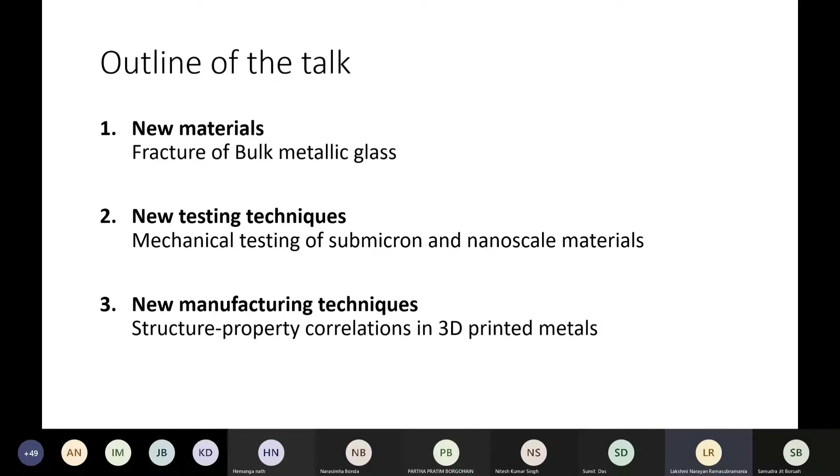It's not like printing a piece of paper. You are going to print real objects using a 3D printer. So we are going to look at aspects of this, the materials aspect as well as the mechanical aspects of these topics, and it's going to be interdisciplinary in nature. I'm going to show you where you can play a role and where materials engineers also learn the subject of mechanical engineering. So to start with, I'll go with my first part where we talk about new materials.

And this leads to crystallization. Crystallization here is nothing but the atoms sitting in a very nice, orderly fashion. You would have heard of several crystal structures by the name of body-centered cubic, face-centered cubic, and different kinds, maybe even hexagonal close-packed. With these kinds of crystal structures, you essentially see that the metal has solidified, and the volume keeps shrinking. You sometimes have shrinkage, different kinds of defects, residual strains, and all those aspects come into the picture of solidification.

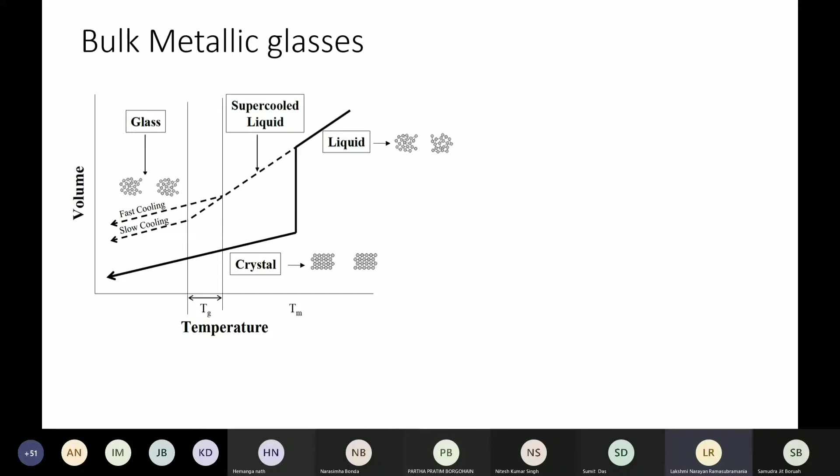However, there is another regime where when you cool it rapidly enough, you can actually make sure that the liquid structure is preserved. The concept that this entails is known as the glass transition, and it happens over a range of temperature known as TG. This is again very well known in polymers. Essentially what happens is you avoid crystallization, although that is the most likely process available to the material. It is thermodynamically favorable for a material to become crystalline rather than a glass, but if you rapidly cool it, you can still preserve the structure of the liquid.

When we look at the micrograph, when you look at this material under the microscope, for most metals which have crystallized, you will see something like this. Of course, you're not going to see balls, what you're going to see is pockets, and each of these pockets represents a grain. There is one pocket which has a certain orientation of these atoms; that is your grain one, and the others have different orientations, and they are separated by something called a grain boundary.

In contrast, in metallic glasses, you have several components. In this case, you can see 4 elements, 4 different kinds of spheres have been used. Because of this, the structure is very random, and since it's very random, you cannot really delineate a space where there is a fixed organization of atoms, or a fixed order of atoms. So these are highly disordered atoms sitting in a pool. And this is a solid, don't think this is a liquid. This is still a solid.

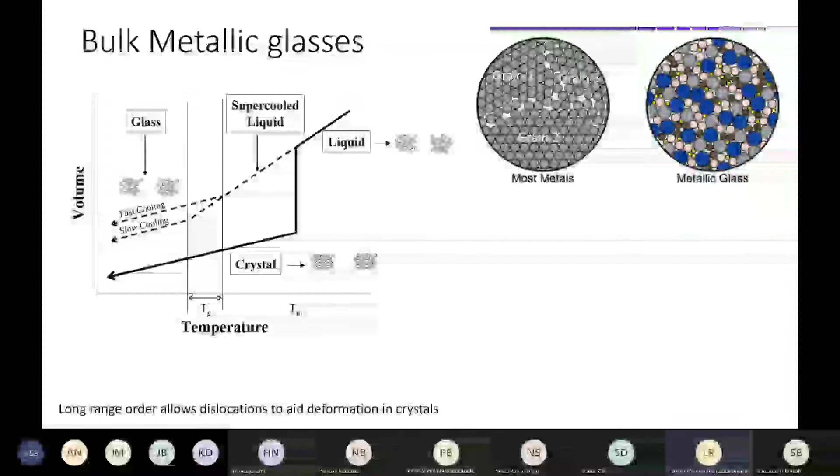The feature you need to remember is that in grains, because of this fixed orientation, you are allowing dislocations to be inside the crystal. You are able to define something called a dislocation. What are dislocations? This is something you would have seen in mechanical metallurgy. There is a plane of atoms which is going to move relative to the other. If you can see this GIF I have posted here, when you shear an object, you essentially create a small dislocation which looks like an inverted T, and that moves across the crystal and cuts through it. So you are able to accommodate plastic strain by this dislocation.

But you cannot define such a thing in metallic glasses. You can obviously see here we can define a crystallographic plane over which this dislocation is sliding, and there are identical bonds above the half plane and below the half plane. So you essentially have the same environment, and there is no net energy loss when this dislocation moves from one end to the other. You're always preserving the number of bonds. But in a metallic glass, you can never achieve that - you cannot define a dislocation.

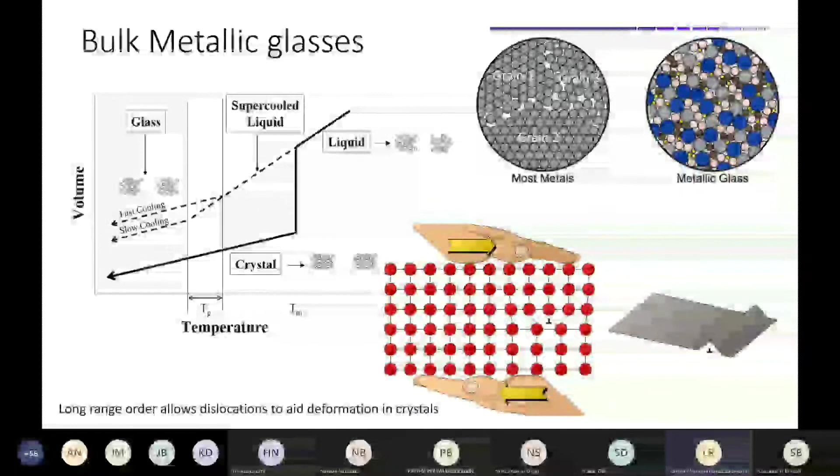So what is so great about metallic glass? I don't know what has happened to my presentation. Just give me a second, I think there is an issue. Yeah, sorry, yes.

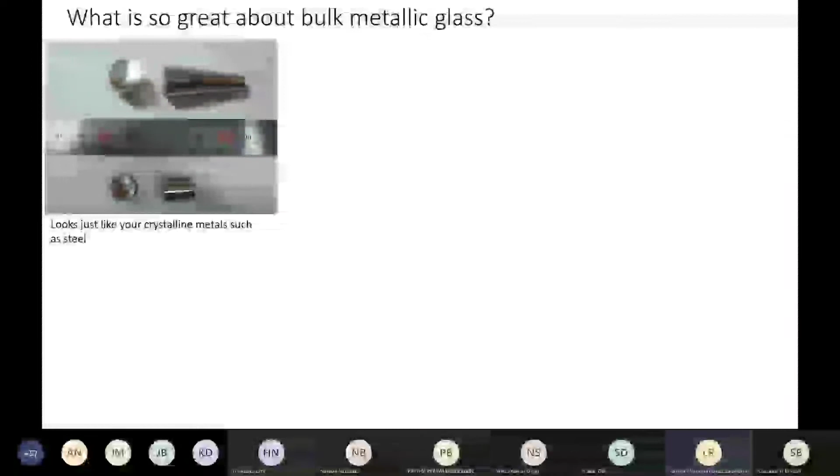So what is so great about metallic glasses? Your metallic glasses just look like crystalline metals such as steel, it will have a very shiny luster - in fact, it is much more shiny than steels. Now, the difference is that when you have a steel base and you drop a ball bearing over the steel base, you see that the ball only bounces a few times. I will let this GIF play in front of you - observe that when this person drops the steel ball over the steel plate, it bounces about 4 times. But when you do the same on a metallic glass base, you see that the ball keeps bouncing on it.

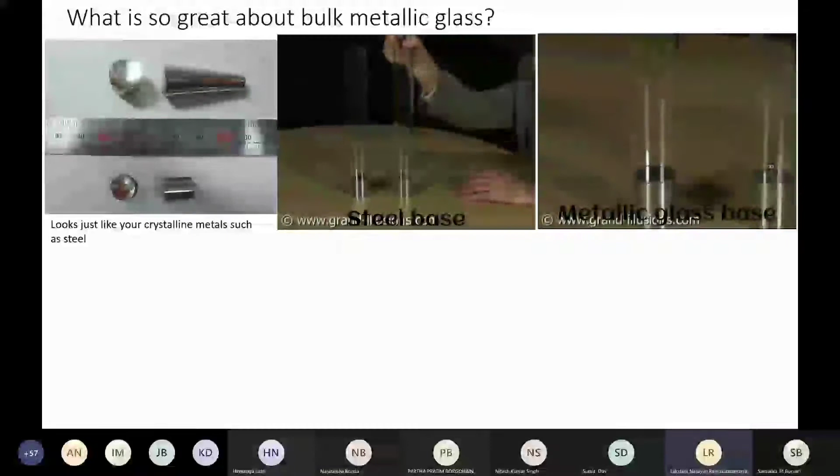You might have heard of coefficient of restitution, but coefficient of restitution is surface dependent. In this case, metallic glass offers a greater amount of bounce, a greater coefficient of restitution, meaning the kinetic energy of the ball is completely returned to it in an ideal situation. So metallic glasses absorb the energy and immediately release it back to the steel ball.

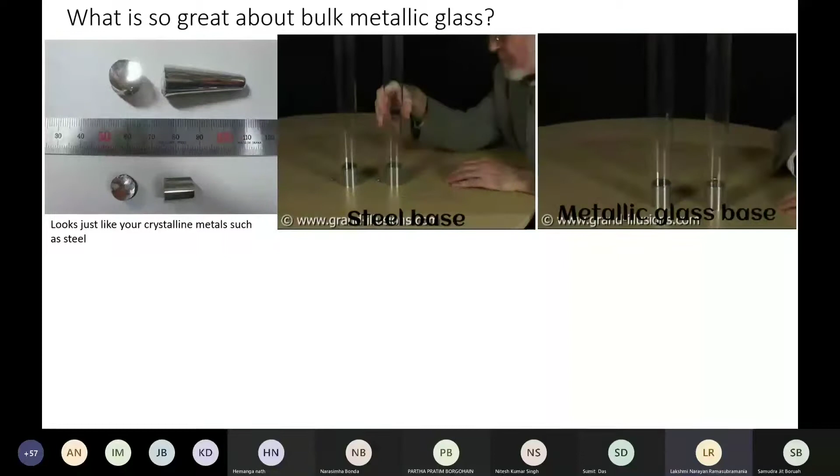What this implies is that if you look at a stress strain curve, you have an elastic region, a yield point, and an ultimate fracture point. Looking at the elastic region, steel has a lesser elastic region than metallic glass. As in, steel will yield at a lower stress than a metallic glass.

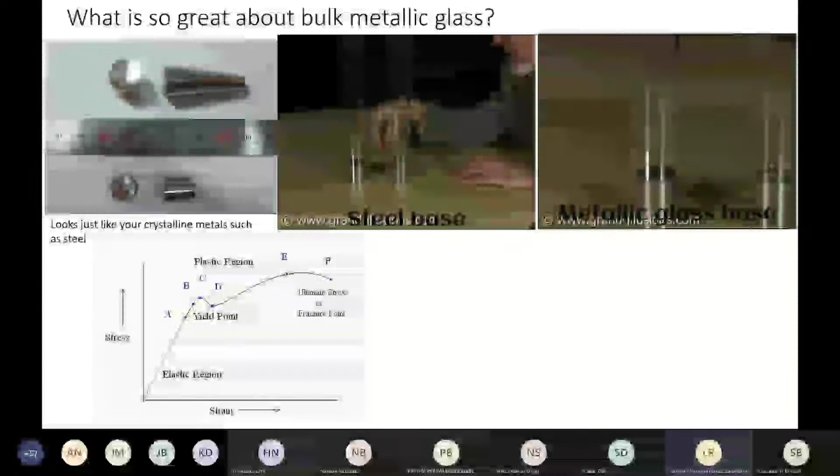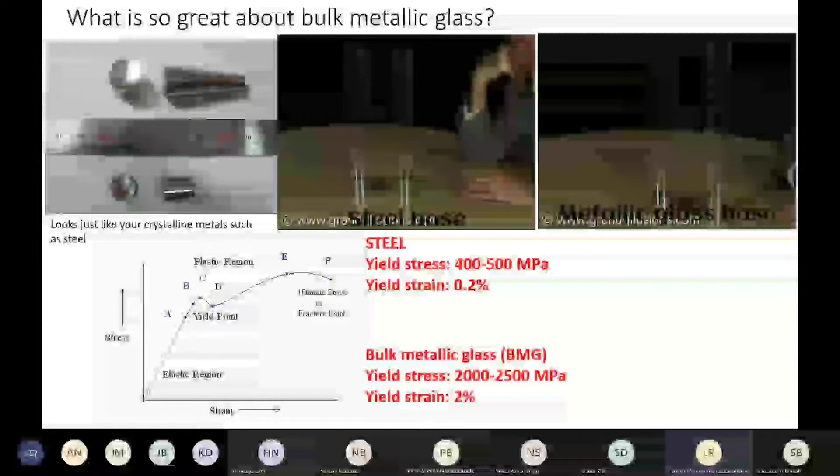And that is what we see. The yield stress of steel is about 400 to 500 MPa, and the yield strain is also 0.2%. On the other hand, metallic glasses are at least 5 to 10 times stronger, and the yield strain is at least 10 times higher, which is exceptional for a material of this class.

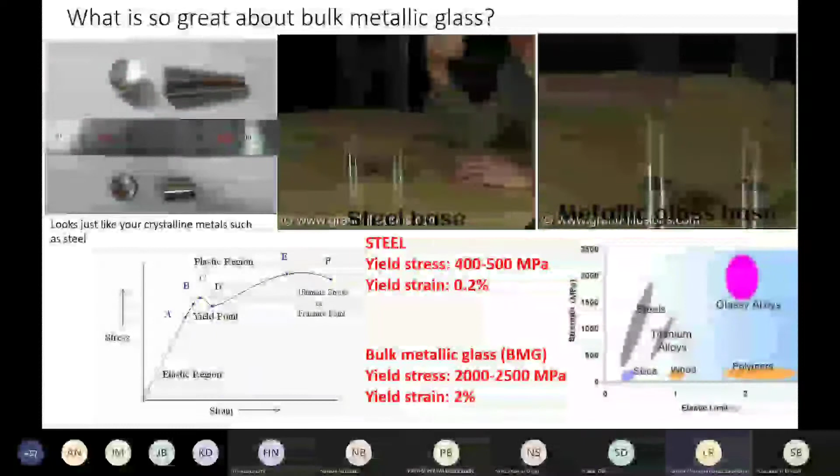So as we can see, these are indeed capable of being stronger than any other conventional crystalline material. And that is why metallic glasses have got a separate space for themselves.

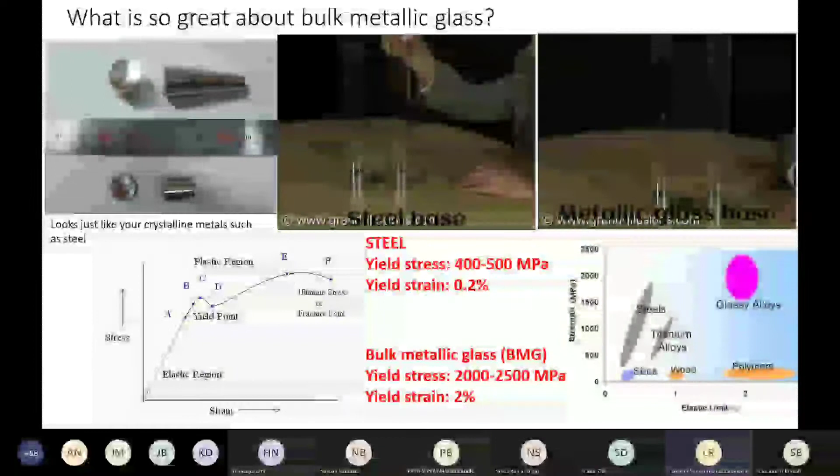If you look at all the materials in a curve comparing strength and elastic limit, metals typically have higher strength but lower elastic limit. Whereas metallic glasses have both high strength and high elastic limits. This is known as an Ashby chart, and we will look at some more as we go ahead.

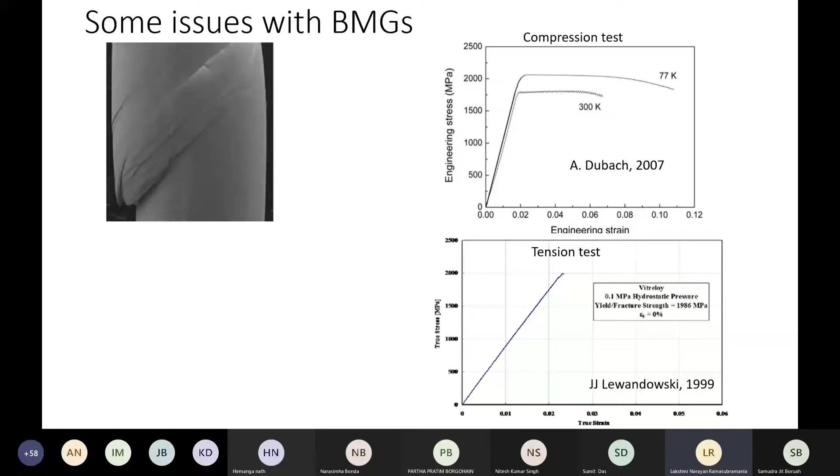But then when I do a tension test, what really happens is that the material does not show anything beyond the yield stress. Again, you see the elastic portion goes up to 2000 MPa, but then after that, the material fails. You don't see any ductility. And that is what we also see, some kind of brittle failure. So this material appears to have plastic deformation only during compression and not during tension.

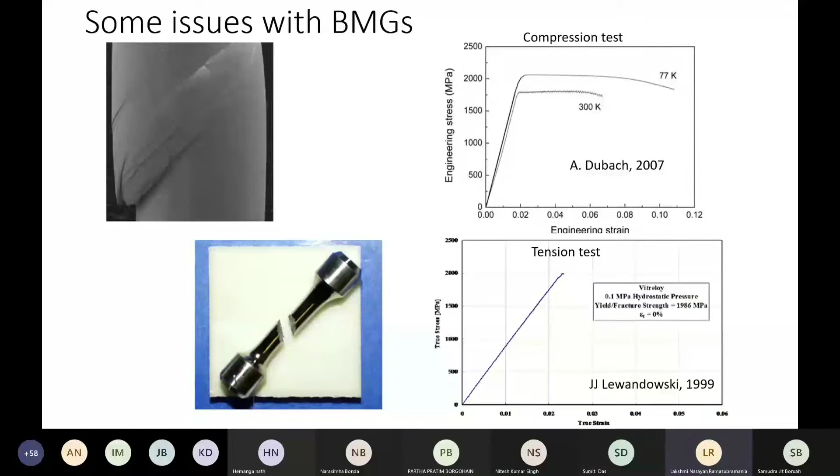So that is a major problem, because in materials used for structural applications, you would want them to deform plastically also. You want them to undergo graceful failure. Otherwise, this would lead to catastrophic failure of materials.

So now we are going to look at some deformation mechanisms to understand why it does not have tensile ductility. The reason is, if you look at an amorphous structure, you really cannot define dislocations, as I had mentioned earlier. So what you do is define small clusters known as shear transformation zones, where one half of this zone moves relative to the other and accommodates strain.

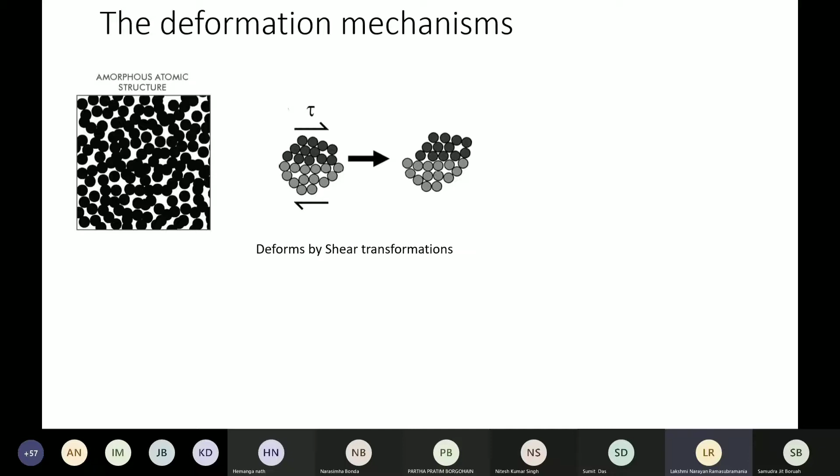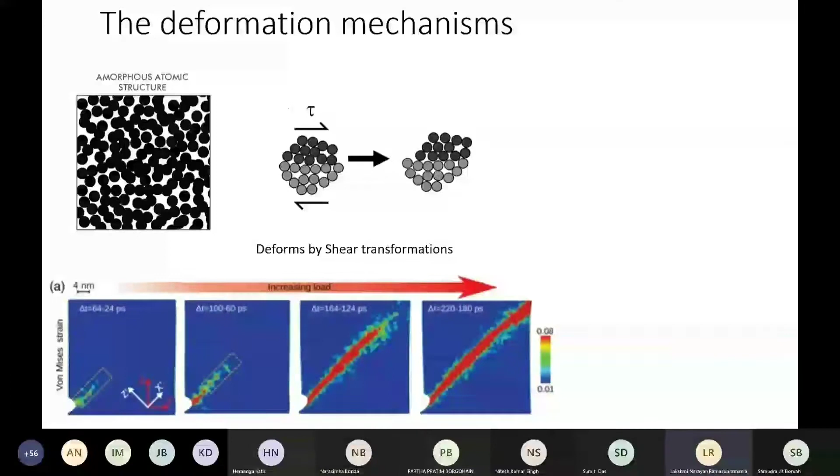This was developed by Ali Argon in his classical paper in 1979. This theory is then used to understand what really happens when plastic strain is developed in a metallic glass. Your shear transformation zones essentially join together inside the material, one by one, collectively, and lead to the formation of a macroscopic shear band, which in reality looks like what you see in this picture.

Now, what are the implications of these shear bands on fracture toughness? Fracture toughness, as you know, is a property extremely related to plasticity. If a material has a higher ability to take more plastic strain, it will have higher fracture toughness. That is what we learned, because we talk about the area under the stress strain curve till failure, which means there's a large scope for plasticity to play a role in fracture toughness.

But fracture toughness, for mechanical engineers, has a very different definition. We are not going to look at the stress strain curve itself. We are going to define a crack, and we are going to see how much the material can prevent the crack from propagating.

So you assume the presence of a flaw, and then you apply loads, and then you see how much resistance a material can offer. That, of course, depends on the amount of plasticity that develops in front of a crack tip. So when people measured this fracture toughness, which is measured as K1C, where 1 implies that you are applying load in the mode 1 condition, and then compare it with

the yield strength in this Ashby chart, and you put all the materials here, you'll see that metallic glasses are again very high toughness materials. At least they are very close to that of your conventional alloys, and also have very high yield strength. So it is a very rare material where you have high yield strength and fracture toughness.

Unlike ceramics, if you look at ceramics, ceramics only have very high yield strength. Let us look at ZrO2, MgO, as well as aluminum oxide. You see, they have very low fracture toughness, probably like 1 MPa root meter, but they have very, very good yield strength. So metallic glasses can actually be an interface, or rather better materials than both ceramics and metals. And that is why these metals are considered very nice.

But if you notice, metallic glasses also have a very high range of toughness. It can be as low as 10 MPa root meter, but also can be as high as 100 MPa root meter. As you can see, the y-axis here is a logarithmic axis, and hence from 10 to 100, the toughness of your metallic glass can vary. So this high level of variability brings in the question, what all factors decide the toughness of metallic glasses? What is the inherent physical or mechanical property that controls your metallic glass fracture toughness?

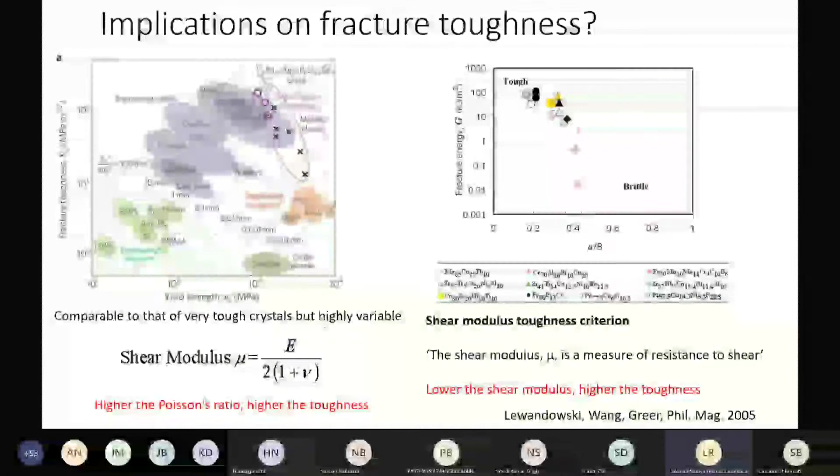But unfortunately, this criterion does not always work, because when you look at a collection of different metallic glasses, they observed that while a critical Poisson's ratio of 0.32 exists, below which you are going to have brittle glasses - for example iron-based glasses, magnesium-based glasses, and calcium-based glasses have very, very low fracture toughness - these have been marked with different kinds of symbols and labeled. And when you go to higher Poisson's ratio, you expect all of them to have very high fracture toughness. For example copper-based, iron-based, some zirconium-based also show very high fracture toughness.

But if you look at some of these small data points on the top right side, you see gold-based metallic glasses have very low fracture toughness, whereas palladium-based glasses are almost as high as 200 kilojoule per meter square. Your gold-based metallic glasses are only 10 kilojoule per meter square - this is the fracture energy, another way of representing your fracture toughness. So gold doesn't really follow this rule, because according to the Poisson's ratio rule, the higher the Poisson's ratio, the higher the fracture toughness should be. So it obviously does not follow this particular criterion.

This criterion may not always work, and there is a reason why - because you're using an elastic parameter to understand plasticity, which is always a questionable thing to do. So what do we do? As mechanical engineers and materials engineers, we look at a structural perspective. That is most important, because mechanical engineers cannot really use an elastic parameter to define a plastic situation, right?

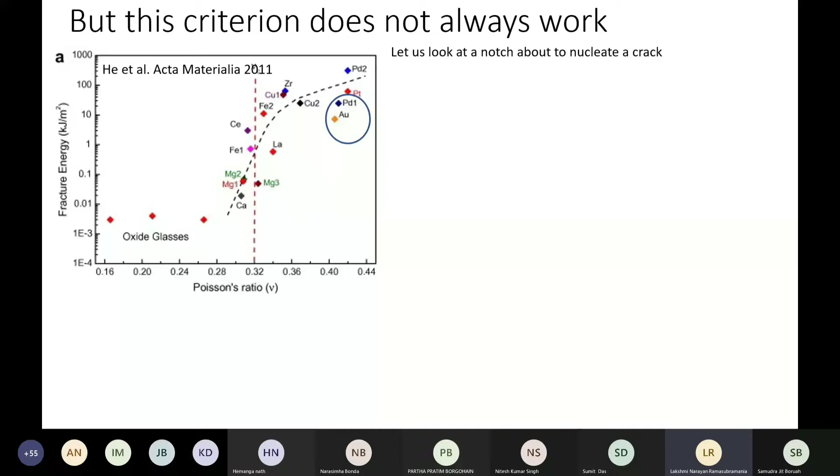So what we'll do is look at the notch which is about to nucleate a crack. What is the nature of this particular notch? There is a stress concentration, and ahead of the stress concentration, when you apply load - remember that the load is being applied in mode 1, which means you can assume that in the plane of the paper this notch is being loaded, essentially force is being applied vertically to this particular picture. So you see several shear bands that are formed in front of the notch tip.

When a crack really nucleates, it forms within one of these shear bands. That is very evident here. You can see on the left, this is just before a crack forms, and on the right, a crack actually goes through one of these shear bands.

Not all of these shear bands are cracks. They can be potential cracks, but only one of them is chosen to be the vehicle for the crack to propagate. So it was found by several researchers, in fact Parag, who is a faculty at IIT Bombay, came up with this criterion that a critical strain has to be reached within this shear band for it to nucleate a crack. That critical strain was given as 10%.

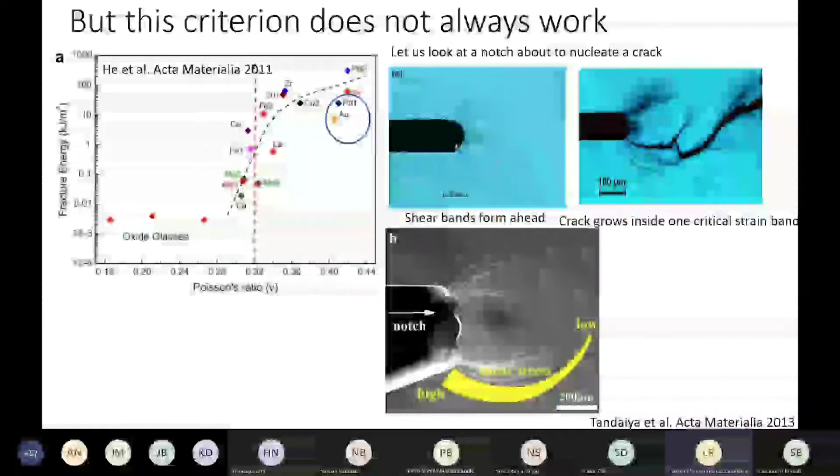And this is followed for all metallic glass systems. You will see that shear bands form in front of a notch, and then within the shear bands, you can always form a crack. This kind of shear band envelope forms in them. This is very unique to metallic glasses. You will never see them in crystalline metals.

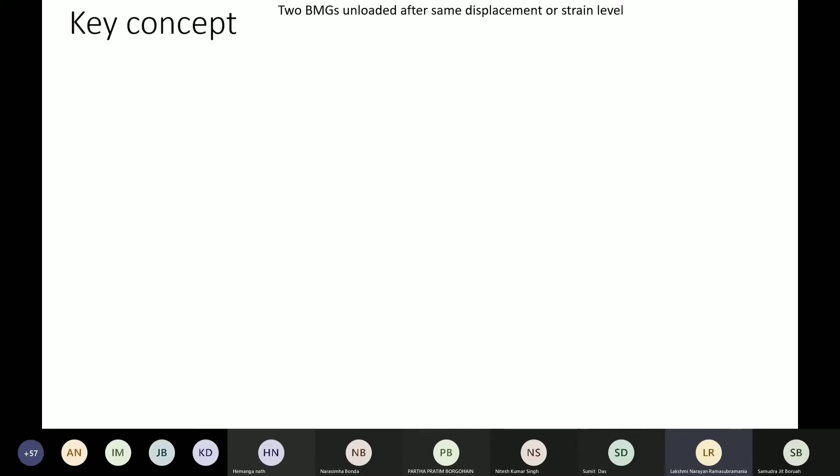So the key concept now is that when you want to compare, and this is where our innovation as a metallurgist comes in, when two BMG compositions are unloaded at the same displacement or strain level, you get two pictures. On the left side is Vitreloy 1, one class of BMG, and on the right side is Vit 105. They have been unloaded at the same displacement level after being deformed to the same displacement level.

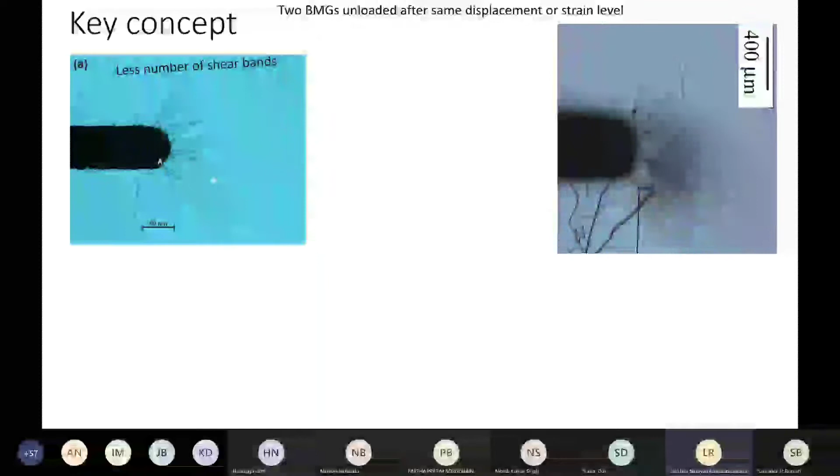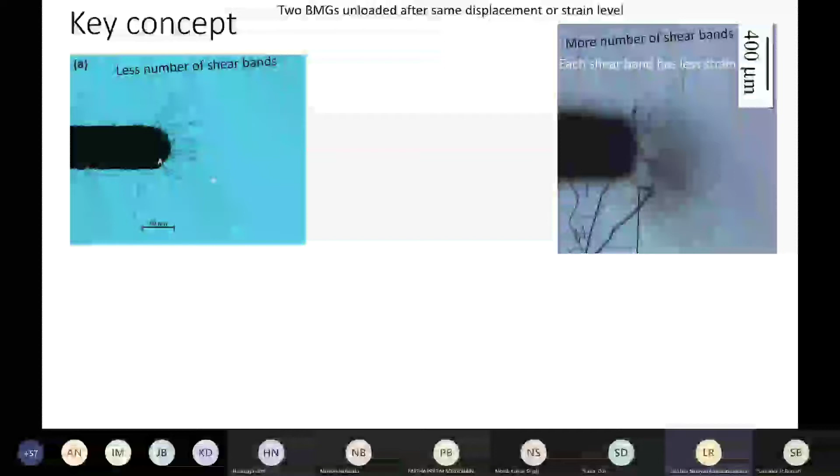On the left side, you will see that the notch contains fewer shear bands, whereas on the right side you will see more shear bands. What does it imply? Assuming that my plastic strain distribution is constant over all the shear bands in both pictures, on the right side each shear band will have a lesser amount of strain, whereas on the left side each shear band has higher strain.

So what does it imply? It implies that the material on the left, which is Vit 1, can attain critical strain in one of the shear bands at a much lower load, and hence it will have a lower fracture toughness.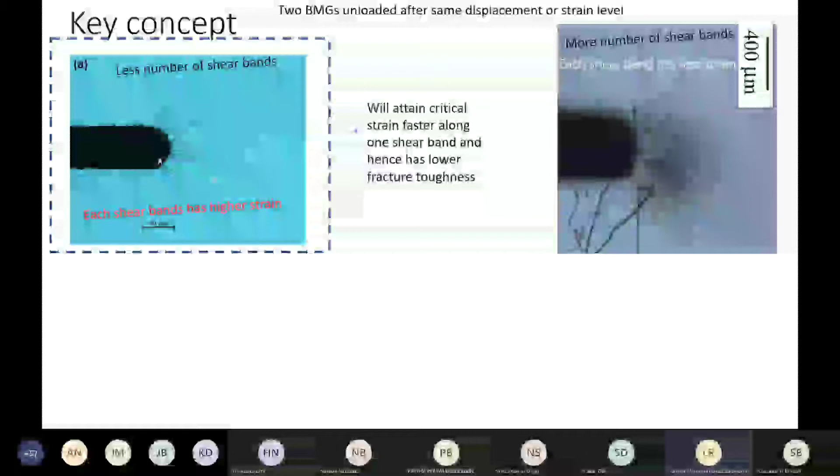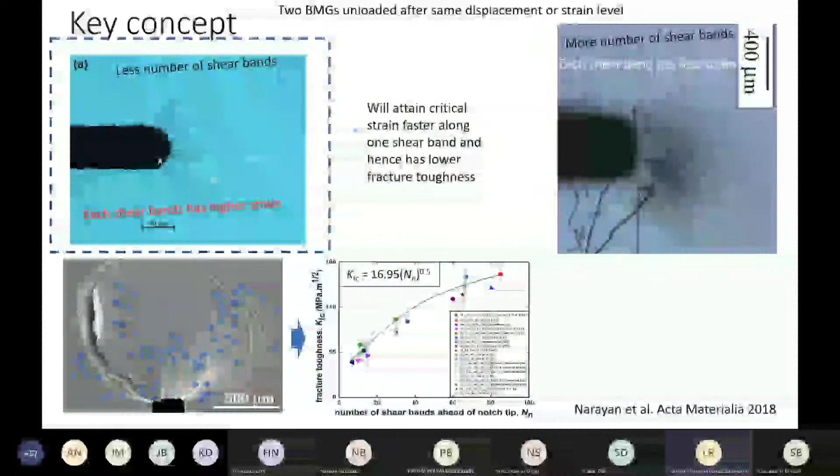Using that idea, what I did was collect the shear band envelope on several metallic glasses. We examined about 22 systems, and we found the number of shear bands actually correlates with the fracture toughness of the material. Once you're able to measure the number of shear bands in front of the notch tip, you can calculate or estimate the fracture toughness of a material. This was one of the ideas with which a materials engineer can understand concepts of mechanics, or even apply empirical theory to know the mechanical property of a material. This is very unique to a metallic glass system and cannot be done for other materials.

Now coming to the second part of my talk, I am going to talk about the mechanical behavior of submicron and nanoscale crystals. This is not an easy job, because when you do lab scale tests, you need millimeter size specimens. What I'm talking about here are specimens thinner than the thickness of your hair. So we are going to test these materials, and how to do it is the question.

There is a lot of innovation in this aspect. Nanomechanics has developed quite a bit. We look at something called a transmission electron microscope, very popularly known as TEM. Here you apply a high voltage and let an electron beam pass from the top from an electron gun. Then the electron beam passes through several magnetic lenses.

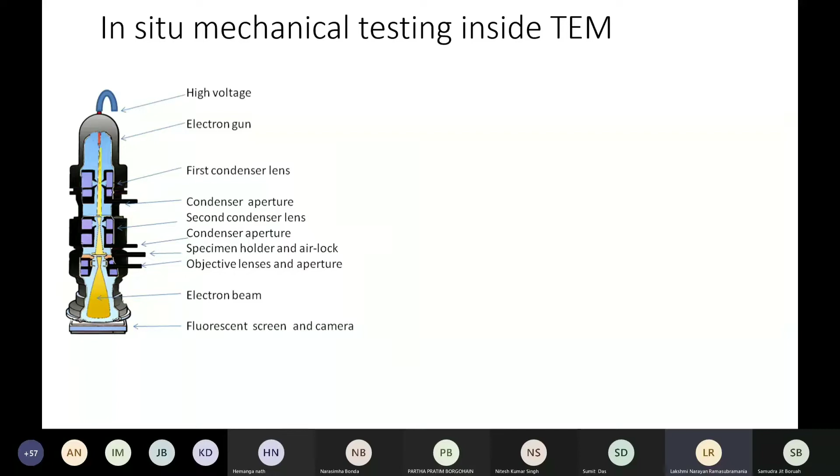These magnetic lenses condense this beam and then pass it through a specimen, which is placed on a holder. Finally, the specimen has to be transparent to the electron beam, and then it goes to a fluorescent screen and a camera. Now there are two types of detectors. When you have this transmitted beam, it can collect two types of information.

For example, when you do an X-ray, the X-ray passes through your body. It can pass through your skin very easily, but not very well through your bones. So you obtain a certain contrast. Your bones will appear white, whereas your skin, or everything else, will appear dark. And then the doctor is able to identify the fracture.

Similarly, there is a bright field mode in TEM where the camera or screen will only observe whatever the electrons are passing through well, and what they are not able to pass through well are shown as dark spots. This is called bright field imaging.

TEM has another mode where you can get diffraction information. William Bragg came up with the concept that materials at the crystallographic level can also diffract light, radiation, or electron beams. This diffraction gives us a lot of information—specifically, crystallographic information.

In crystals, when they have regular planes, these planes act as diffraction slits or diffraction gratings, which can cause interference in the electron beam. These interference patterns are captured at the fluorescent screen and appear as a spotted pattern. Because your electron beam is also a spot, these spots are diffracted spots. When you do imaging with one of these diffracted spots, shown in the inset of figure A, you obtain an image with a dark background but bright spots. So the imaging done by the diffracted beam is known as dark field imaging.

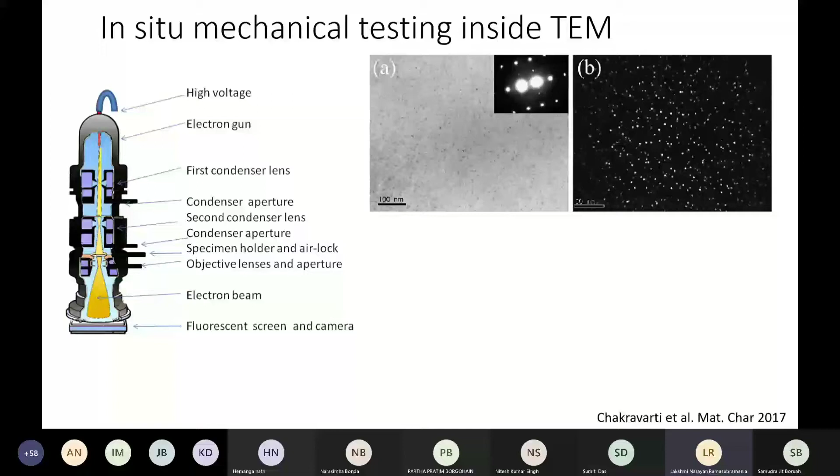So let's not go into details. What it essentially implies is that if you use one of the diffraction spots shown in the inset of A, you obtain a feature captured by the property of that particular diffracted spot. This technique is very popular for determining dislocations. You can see several dislocations here, and the bright field as well as dark field image show some contrast, because the beam can also diffract through a dislocation, since it represents a mismatch in the order of the plane, or the arrangement in an atomic plane.

So now we are going to do mechanical testing inside the TEM. That is how we do it, because we have to observe the stress and strain—we have to observe what happens inside the material. That is the purpose.

Several companies have now developed a sample holder in this fashion, where you keep the sample on the right hand side of the holder, and on the left hand side there is a movable screw. This movable screw can move in the tensile direction as depicted here.

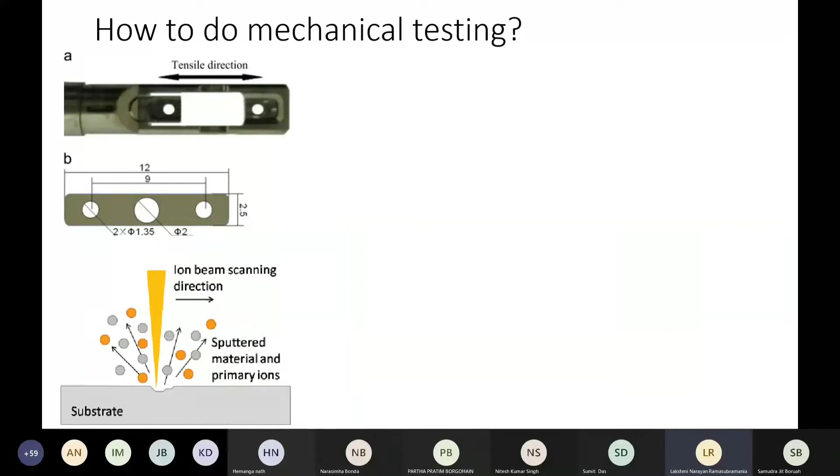What we do is use something called focused ion beam, where gallium ions are pumped onto a surface and actually cut through the material to give you the desired shape. Why do we do this? Because we need to form a tensile sample of this nature.

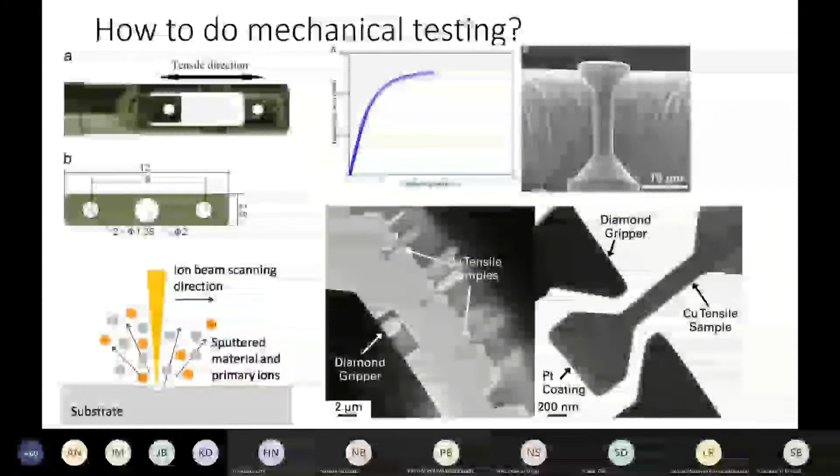This is going to show a tensile test on a copper sample. We are going to look at the deformation of some single crystals, and with that, I start with deformation of copper.

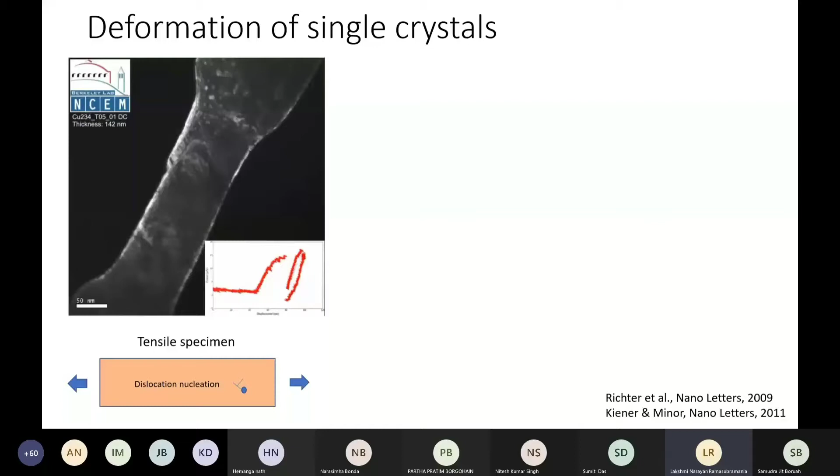So what really happens here? First, when you have a tensile specimen in a single crystal, you do not have a lot of defects at the submicron level, because your defects are going to be statistically fewer in a material that is so small. So your material has to nucleate dislocations, and that is why the strength is also high.

So when a dislocation is nucleated from a source, it will start moving on a particular slip plane. As it keeps moving, the dislocation will see the surface and escape. As we had seen in the previous figure in the first few slides, the dislocation moves from one end to the other. When it escapes, it creates a surface offset.

What has happened is the cross-section area across this plane has reduced compared to the specimen, which means this will experience higher stress, since stress is force divided by cross-section area. This leads to further stress concentration in the sample, and something called localization occurs.

As a result, these samples, although they have very high strengths, look at the kind of strengths you can obtain in copper single crystal. Your actual strength of copper in the bulk form is about 600 MPa or even lesser, but when you go to a very, very low size scale, you see that the true strength is almost 6 GPa.

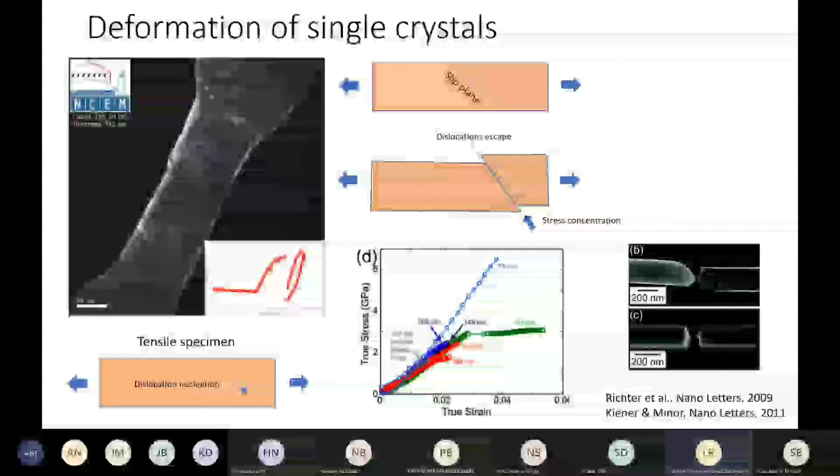This is about 10 times higher. So you can actually strengthen the material quite a bit, but the ductility is very poor. For a 75 nanometer sized material, the ductility is very poor. You don't really see plasticity occurring because dislocations escape. This is also seen for different kinds of films, where you see brittle failure and other such features.

So now if I look at BCC materials, again a similar thing was observed. We are looking at a titanium zirconium alloy, which has a BCC phase. Here is the dark field image of the same, and I'm going to show you another video.

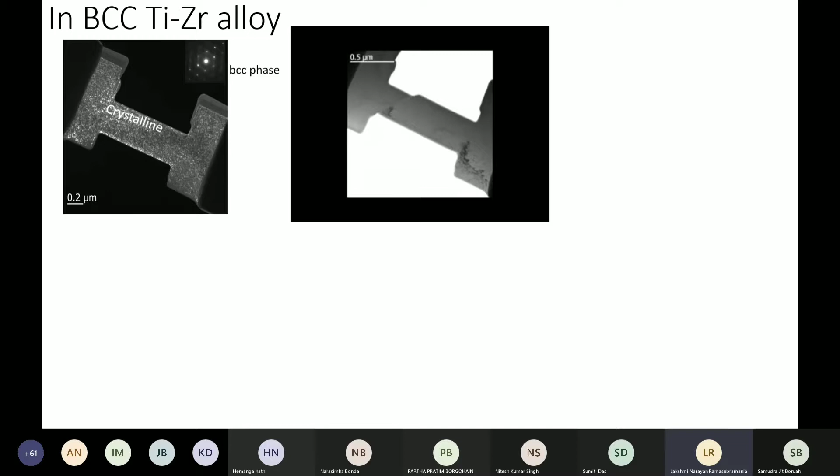Here your tensile axis is diagonal, and you see that this sample is yielding, and then you see the formation of an offset. This offset grows, and the sample no longer undergoes uniform elongation. Uniform elongation is necessary for a sample to exhibit ductility, and that does not happen.

So if you look at the sequence of events, at 0% strain you don't see much. As you increase the strain, certain features start developing in the crystal, and you see two slip bands which are activated. These are snapshots taken from the same TEM video.

You see that the material has undergone shear over one plane, and after that, the other plane which was activated initially at 3.1% strain stops getting slipped, and failure has already occurred.

We did the same experiment with an amorphous material. Here you see there is a difference in the diffraction pattern - you see a small round halo, which is called a diffraction ring. So instead of a spot pattern, you find a diffused ring in metallic glasses, because it does not have crystallographic planes, so all atoms will scatter either X-rays or electron beam in this fashion.

So you always observe a very scattered peak in X-ray, or you will see a diffraction ring when you do a TEM of a metallic glass sample. Remember, your samples have to be very thin because your electron beam has to pass through it. So the thickness of these samples is going to be less than 100 nanometers, but your width can be slightly higher.

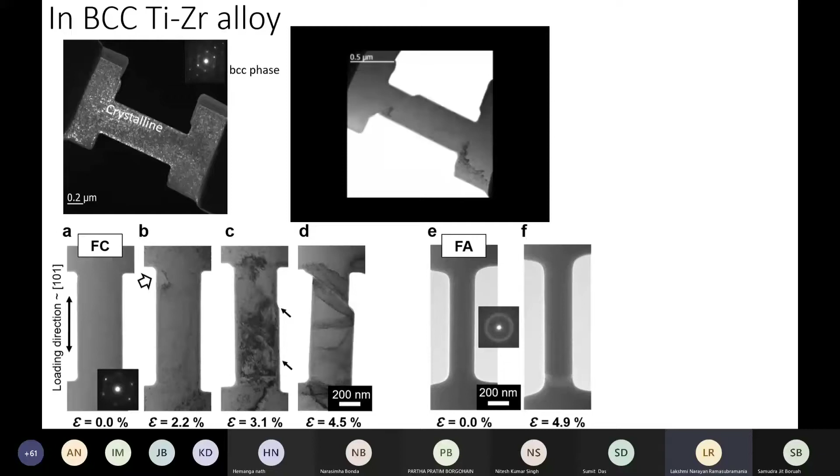So our idea is we need to make sure that ductility improves. For that, we see that dislocations should not be allowed to escape the crystal. If they are allowed to escape, deformation will immediately concentrate at that line where the dislocation has exited, and it will keep increasing the stress over it. So how do we do that?

We are going to build a specimen which has barriers in it. We are going to make materials which have barriers in them. Here twins are being used as barriers, and wherever a dislocation starts propagating, it goes and encounters a twin boundary. It cannot move further because the orientation across the twin boundary will be different, and this dislocation cannot go through them.

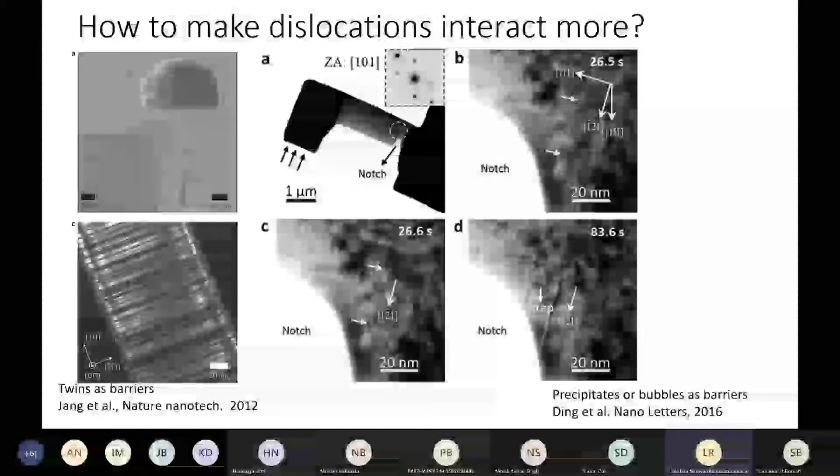Another way is to use irradiation-based bubbles. Here helium bubbles have been put in the sample where they interact with dislocations and don't allow them to pass through. So you're essentially making sure that dislocations are not able to exit the crystal and interact with other dislocations, to give more strength as well as higher plasticity.

So what we tried was an amorphous-crystalline bilayer. It's a very interesting experiment in the sense that nobody knows what will happen if you stack them up together and start stretching them. And in this experiment, we did exactly that.

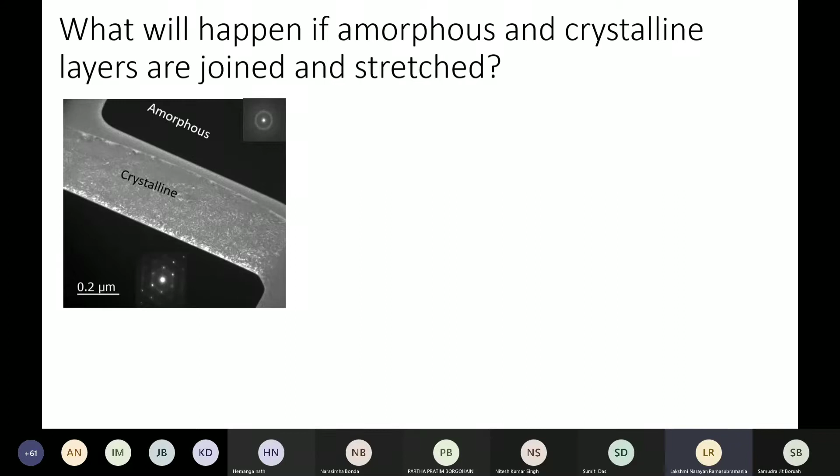We used a crystalline layer which has a very similar crystal structure to the one we examined before, and then a very thin amorphous layer over this. I'm going to show this video of the experiment which we did - it's very sped up because it would otherwise take a long time.

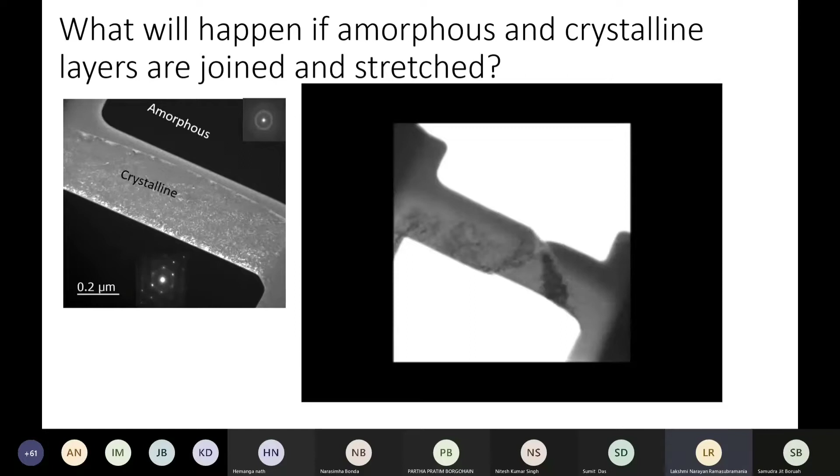If you observe, nothing happens for some time, and then you see the formation of very thick bands that extend throughout the crystal. Finally, the amorphous phase starts deforming a bit, and the crystal will fracture. At this moment, uniform elongation stops when the amorphous material has yielded. Let us look at the salient features one by one.

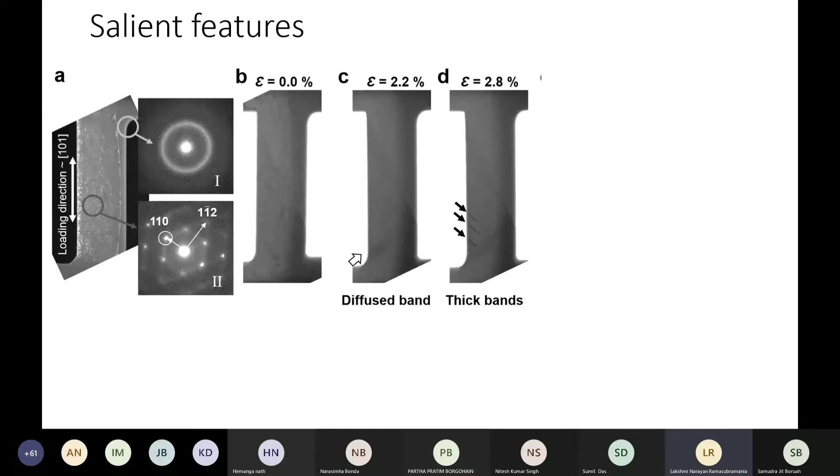Then at 2.8% strain, perpendicular to these diffused bands, three or four thick bands form — you can see the fourth one is very mild, but these are essentially the thick bands. However, these thick bands are not able to penetrate the amorphous layer.

So what happens is you get the formation of another thick band far away and another very diffused band, which may not even be visible. That's because this plane is perpendicular to the viewing plane of the electron microscope, so we only see the edge, and it's very diffused. We won't see the contrast well, but the diffuse band exists, and we can see it when we change the contrast of the image.

A shear offset also forms, but it does not grow. On further deformation, up to 12% strain, the material can get deformed. If you remember, the crystalline phase alone can only deform up to 4.5%, but you can get about 12% elongation when you put an amorphous layer — almost 3 times higher.

So how are we able to obtain this disproportionate increase in strain to failure, when even linearly adding the strains to failure of both phases only gives about 8%? Why is this happening? We did another test to observe what these bands are. These dark bands are nothing but slip over different dislocation slip planes, identified as the 110 and bar-110 planes — notations for different crystallographic planes in the material.

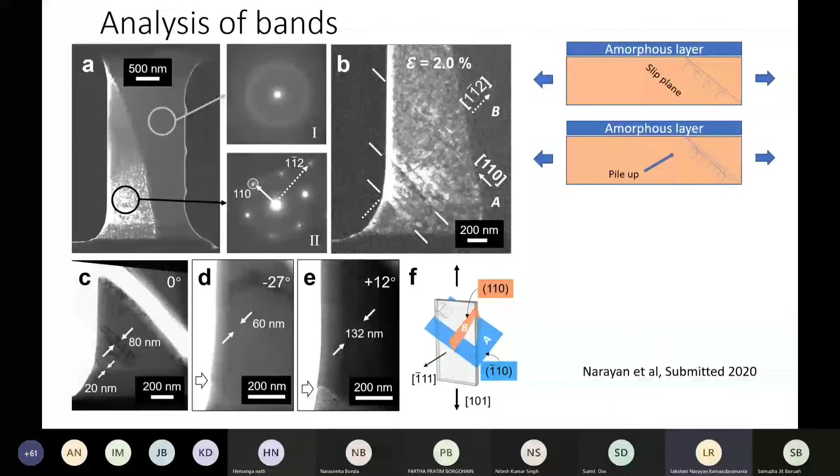Now, to understand the process, consider that an amorphous layer has been kept on the crystalline layer. Let's say a corner is nucleating dislocation slip, and dislocations start propagating over this slip plane. As they hit the interface, they are not able to go through it, so a shear step cannot form. The amorphous layer is blocking this slip, leading to a pileup — dislocations interact more, but since they cannot go further, this plane becomes strain hardened.

Then another slip plane gets activated in some other part of the crystal, which is what was happening — you saw a thick dark band as dislocations got activated elsewhere. These dislocations move toward the amorphous layer and again get trapped and blocked, preventing further dislocation development along that plane, which strain hardens the crystal further. When several such events occur all over the crystal, it leads to homogeneous deformation, or distribution of strain, due to activation of slip on different areas of the crystal.

So this is another way mechanical testing at this scale can help develop materials for devices or sensors with moving parts. You can see that mechanical or structural reliability can be obtained by doing careful experiments and understanding the core principles that lead to higher ductility or higher plasticity.

The final part I'm going to talk about is structure-property correlations in 3D printed materials. This is very interesting because it's a new manufacturing method. In this method, you have a material in powder form, and you use a power source to melt or sinter it. So in 3D printing, we are now optimizing the future of manufacturing, and I'm going to show you how.

Let's say you want to make an engine blisk. This is an engine blisk — it's used in propellers, turbines, or jet engines; you'll always see this blisk.

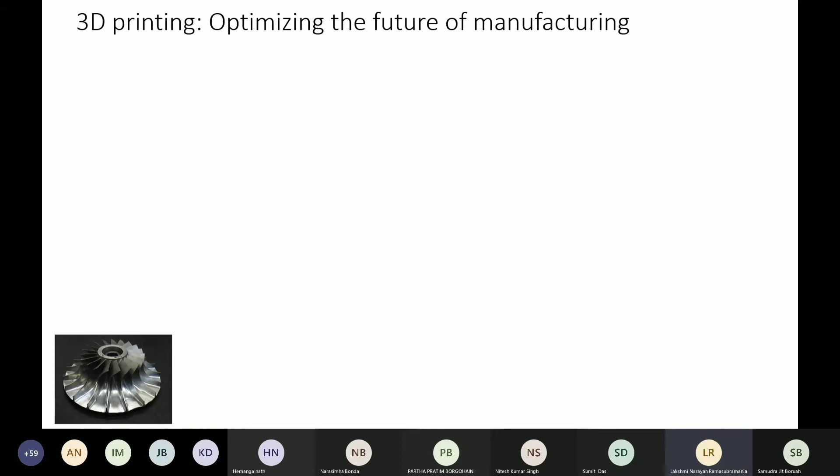Now, if you want to build this fan, your typical metallurgist will tell you that you will cast this material, whatever the blisk is made of, let's say a nickel-based superalloy. Then you will forge it into an ingot, and then you will shape the component by machining. So there is a 3-step, 4-step process. If you now go to an engineer who has made a 3D printer, he will tell you that all this is conventional manufacturing. This is what we used to do in the age of the Mughals probably, and later on, up to the age of 2000.

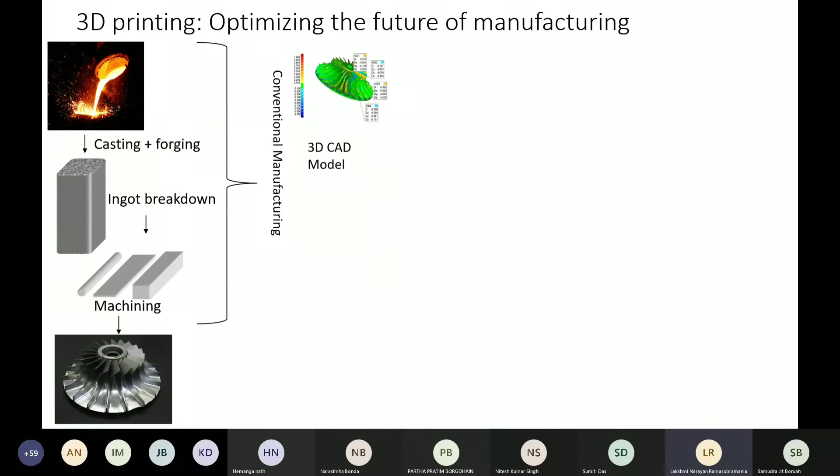But now we have come up with an idea where if you have a 3D CAD model of any tool that you want to make, let's say here the blisk, we enter this into a computer which has a robotic arm, and this robotic arm will now spread the powder on a bed, and then it will also give you this blisk.

And how does this happen? This seems like magic, obviously. But what happens is you have a retracting powder bed wherein you have given the instruction to the computer that the laser should run over a certain pattern. Once that pattern has been melted by the laser or the electron beam, the bed retracts downwards and then another layer of powder is deposited over the same bed. So it is nothing but layer by layer, piece by piece reconstruction of the material which has been fed into it, done by either melting or sintering the powders using a laser beam or an electron beam.

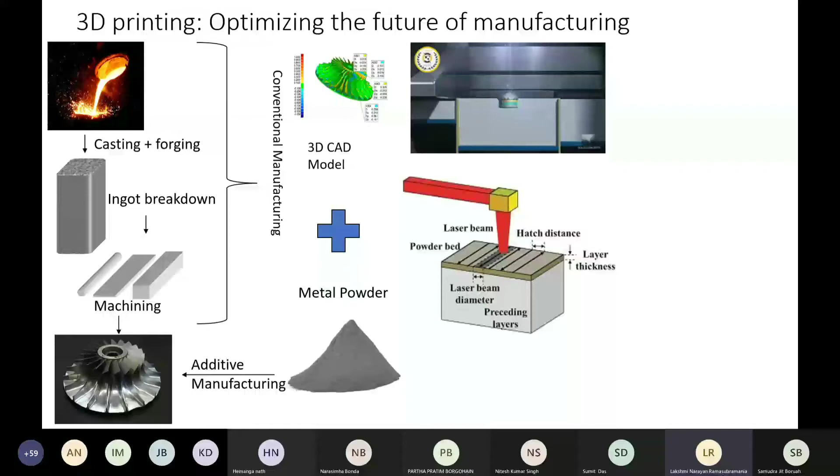And this is how the process looks like. And with this, we can also see the kind of process parameters that are coming into play.

One is you are going to look at the laser beam or the electron beam power. Or you are going to see something known as hatch distance or hatch spacing. Then the layer thickness, the powder which has been overlaid or which is going to be printed by this laser beam again becomes a factor. Then you have a powder bed, and of course, you are going to see the laser beam diameter. Now the hatch distance and laser beam diameter are slightly different. You can have overlapping laser beams depending on if you increase or reduce the hatch distance. So these parameters become important.

Of course, the laser beam speed is also a parameter. The other thing which comes in is known as your scan strategy or hatching strategy. You can spread the movement or the displacement of the laser beam in different directions to get different kinds of results or different kinds of mesoscale structures. So now we will just look at two very important aspects which are under our control, which is laser power and velocity. And when we have laser power and velocity, what influence does it have on printing parameters?

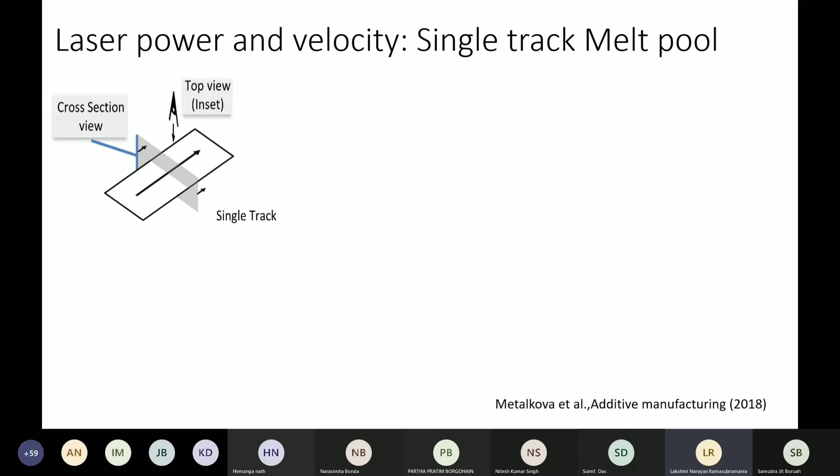What we are going to look at is something called a single track melt pool. So what happens is you assume that a laser is running over a plane in a straight line, and I am going to cut the cross section of this material and look at it in a metallographic or optical microscope. What you see here is that this cross section will show you a melt pool, and immediately you can recognize it is very similar to what you see in welding. In welding also you see a similar weld bead. So this is a process which is nothing but welding which is upscaled to build a component.

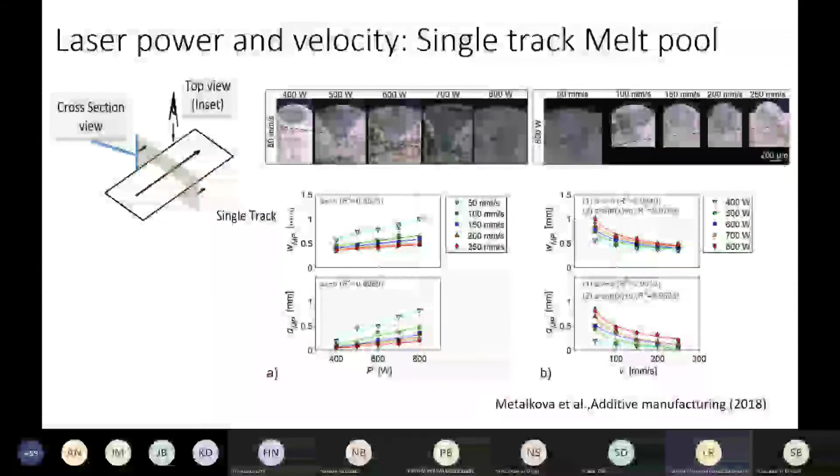Now the shape of this melt pool obviously changes when you change the power and it changes when you change the speed. Either of these parameters, the shape and the aspect ratio of the melt pool changes. And a lot of studies have focused on this aspect. They look at the width and the depth, essentially the aspect ratio of the melt pool. And then they've shown that it increases or decreases depending on the speed as well as the power of the laser.

Now let us look at the different kinds of structural defects that come in AM, and this is important because we are talking about melt pools, and it depends on the melt pool as to how the defects are coming in the first place.

The first kind of defect is known as keyhole porosity. A keyhole occurs when you use a very high power laser beam and a very low velocity, so the power is concentrated at one spot for a long time. The laser will heat a very deep envelope of material, resulting in a high aspect ratio geometry. What happens is when this geometry is created, you always have a pore at the bottom of it.

There is another type of defect called balling, or bead up. When you use higher speeds, the material at a particular place starts balling up and solidifying separately from the powder bed. This happens at moderate speeds and moderate power.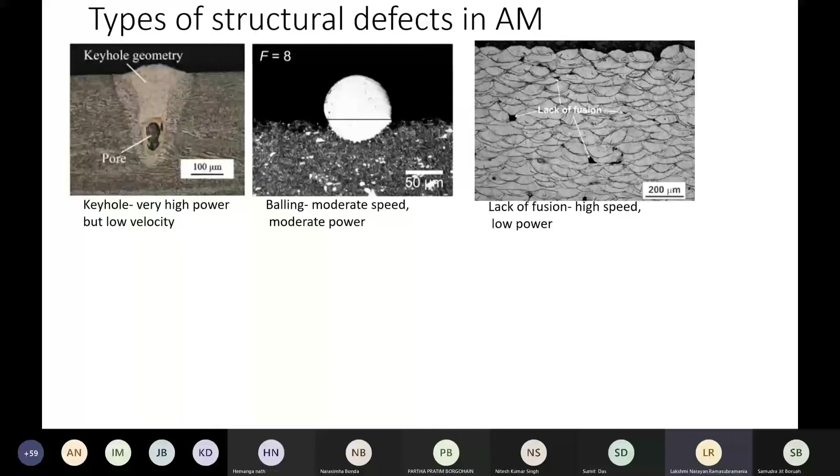But if you use very high speed and low power, you won't have enough time to fuse the material together, which results in lack of fusion. This happens at high speeds and low power.

Finally, you have a process space: at high powers, keyholing occurs because the laser bores through the material. Keyholing occurs at lower velocities, and at very high velocities with low power, you see lack of fusion. In between, you can have bead up. This process space decides where you can do ideal printing, and this particular rectangle shown was identified as the ideal space.

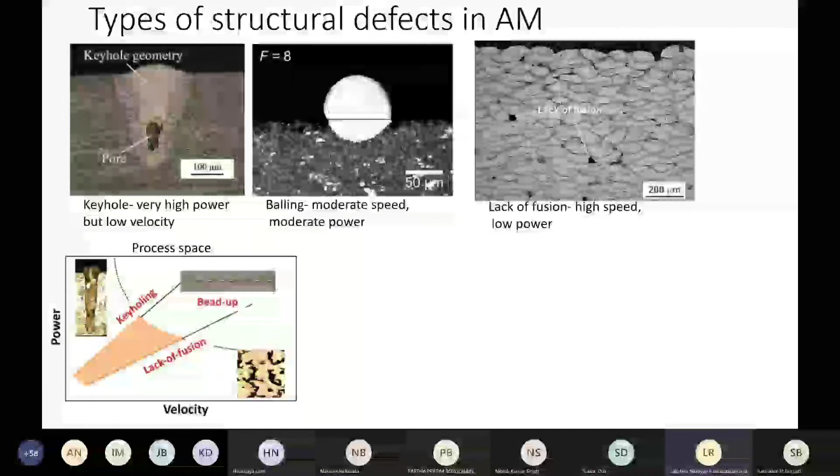Unfortunately, even if you do this, you can still not avoid defects completely. Apart from these, defects form due to gases in the material, which are released when the laser beam runs over it. So gases are created which go and sit inside the material as metallurgical pores, known as gas porosities.

You can also have keyhole porosities for some other reason, but we will look at what leads to that. We will have to live with gas pores anyway because it is inherent to an AM process, like a welding or sintering process, and these are powders which have spherical shapes, so they will always result in some kind of gas porosity. But other pores need to be avoided, such as lack of fusion, balling up, and keyhole geometry.

Now we will do the same exercise in an in situ alloyed additive manufacturing setup. So what is in situ alloying? We use two different materials, titanium and niobium. We mix them together and form a powder mixture, which is then kept spread over your 3D printer bed.

Then a laser runs over it, and it keeps solidifying. This is probably not very homogeneously mixed, but the melt pool is created in such a way that the material homogenizes itself and forms an alloy. That is why it is called in situ alloying. Titanium and niobium were initially separate, but later become a titanium niobium alloy. This was done reasonably successfully.

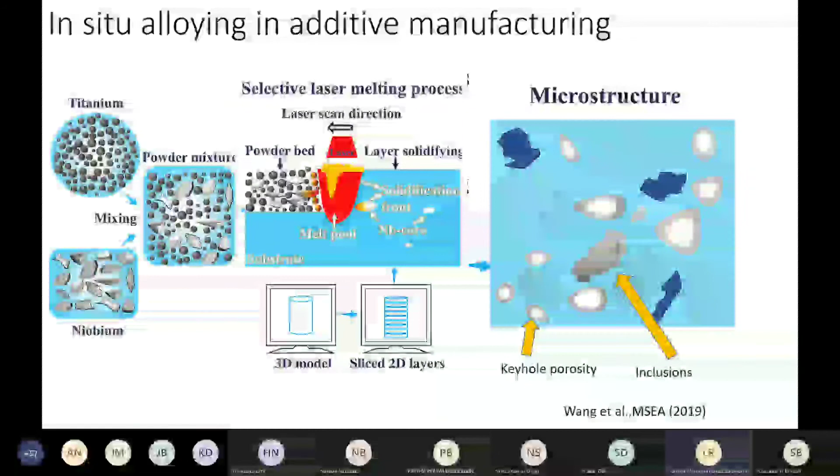But unfortunately, what they saw in the microstructure was keyhole porosities, shown as white spaces, as well as niobium inclusions. These are the two defects you don't want to see, because niobium inclusions create local clustering of grains, leading to equiaxed grains, whereas you want columnar grains. Keyhole porosity also has bad effects on fatigue as well as ductility. So you want to avoid these two.

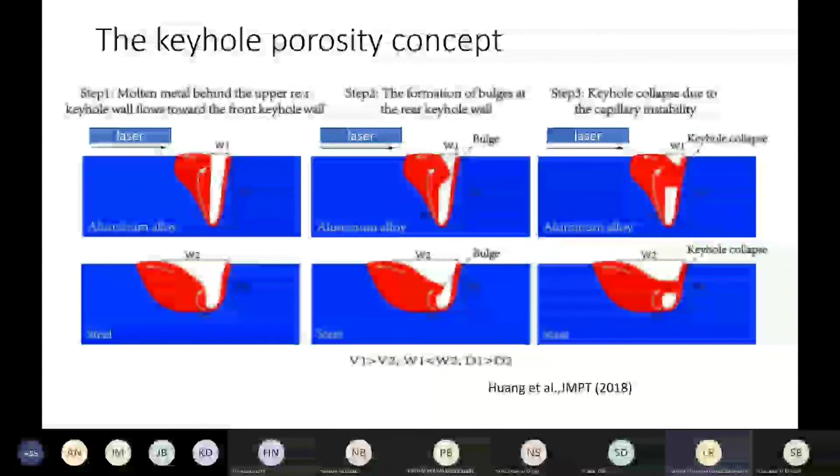So how keyhole porosity forms is the basis of how we are going to eliminate it. We look at a molten melt pool: at a very high aspect ratio, when the laser is scanning left to right, the back end of the pool starts bulging out and moves towards the front end of the pool. Finally, due to capillary forces or capillary instability, this keyhole collapses, and you get the storage of a porosity. That is how keyhole porosity essentially forms, shown here in two different metals, an aluminum alloy and a steel.

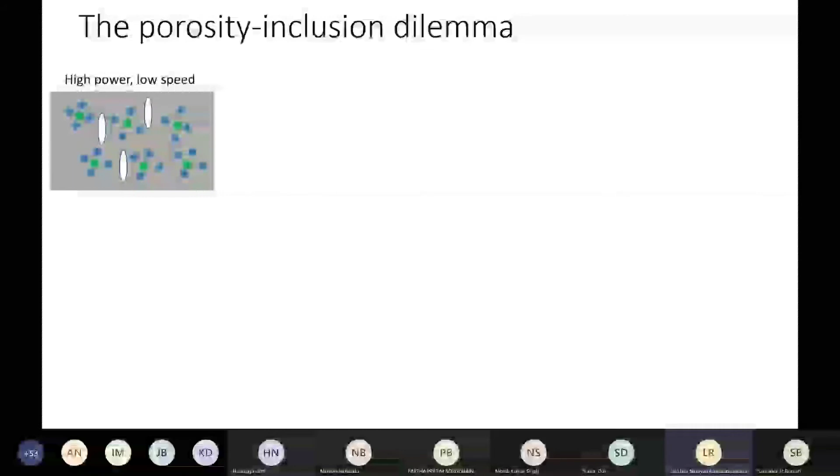Thus we come to something known as the porosity inclusion dilemma, which is a fundamental problem in 3D printing. If you can resolve this problem, you'll be very successful in building very high quality parts. First, when you use high power and low speed, keyhole porosity will form because the laser bores through the powder and heats a lot of material. Because you have low speed, more material is exposed, and you'll have a high aspect ratio melt pool. Apart from that, you will still have some inclusion, but much lesser than what you would expect.

If we use moderate power and speed, we saw that initially the melt track or single track of the melt pool is terrible. It doesn't look very stable, it sort of forms something like a bead. And if we increase the power and speed further, the melt pool becomes even more messy.

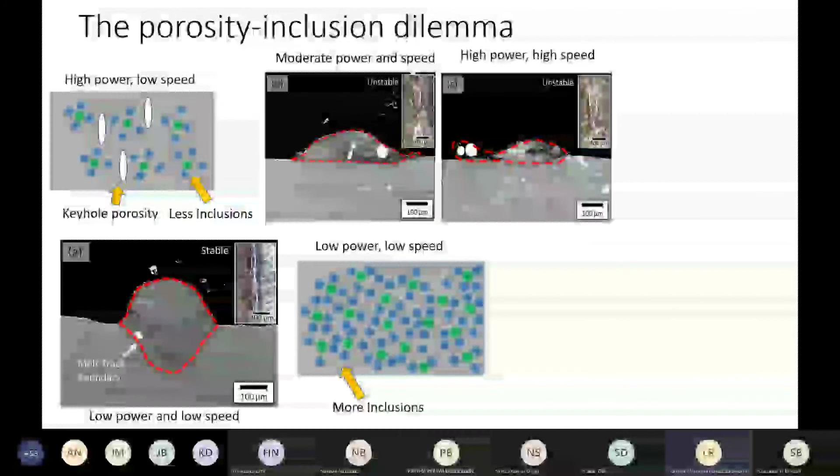What you can do is use lower power and very high speed, which results in lack of fusion, but there's a window where you can keep it reasonably low power and low speed so the melt pool looks very nice. The problem with low power and low speed is you get more inclusions because you're not inputting enough power for the niobium to melt. Niobium has intrinsically a higher melting temperature than titanium, so titanium melts first and niobium sometimes remains as inclusions. Low power, low speed creates this problem, but people have been living with it because it's much better than getting keyhole porosity, which is like a hole in the material.

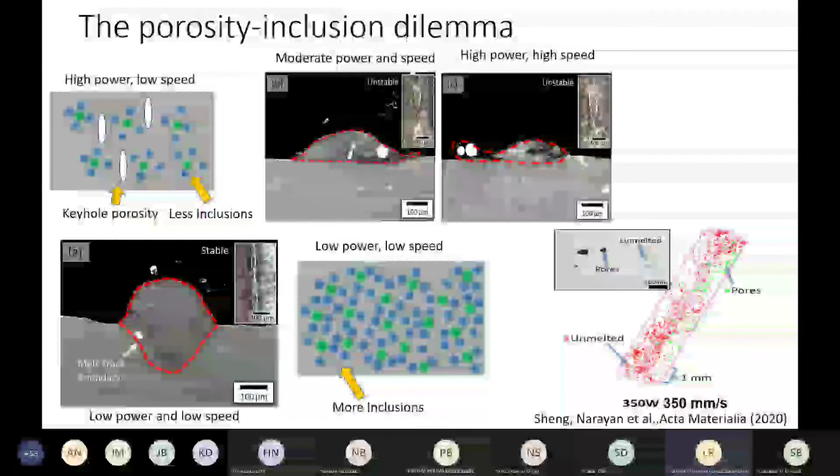Now, what happens is this was done, and we observed there were several pores as well as inclusions in the material, which caused a lot of problems. So the solution was to change the stripe printing strategy.

In the stripe printing strategy, instead of a single track, we move on to a single stripe strategy. Here you still move in the same direction, but the laser keeps moving back and forth in the perpendicular direction.

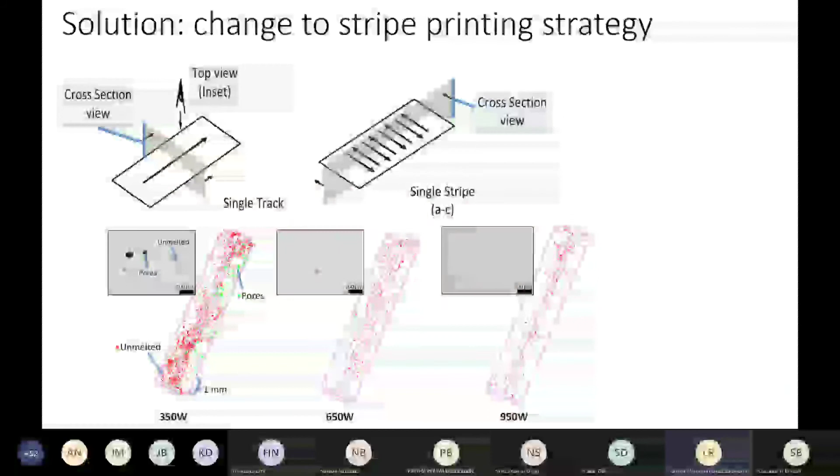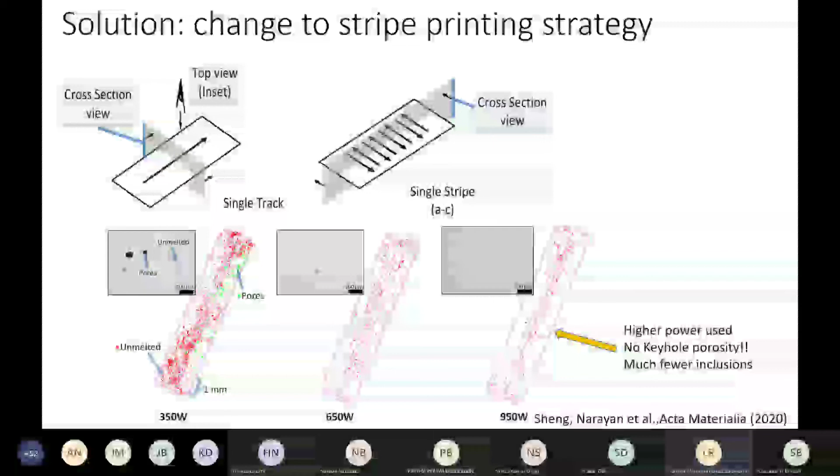If you look at the material made by this strategy, where the laser moves in the given direction but also perpendicularly and rapidly, you'll see that with increase in power, the porosity and inclusion content keeps decreasing. In fact, for very high power, we did not observe any keyhole porosity and had much fewer inclusions. This printing strategy itself was able to give us very high quality material, eliminating keyhole porosity completely, which is actually a very significant landmark.

How does this work? We tried to simulate the heat in this kind of strategy. This is your single stripe strategy where the laser is moving in one direction. This is how it looks: it's moving in one direction, and you see that small thing is the heat signature of the melt pool. This heat signature will keep moving along with the laser beam, because immediately the material will solidify as surrounding material cools it. So our heat signature will only move along with the laser beam wherever the laser beam is.

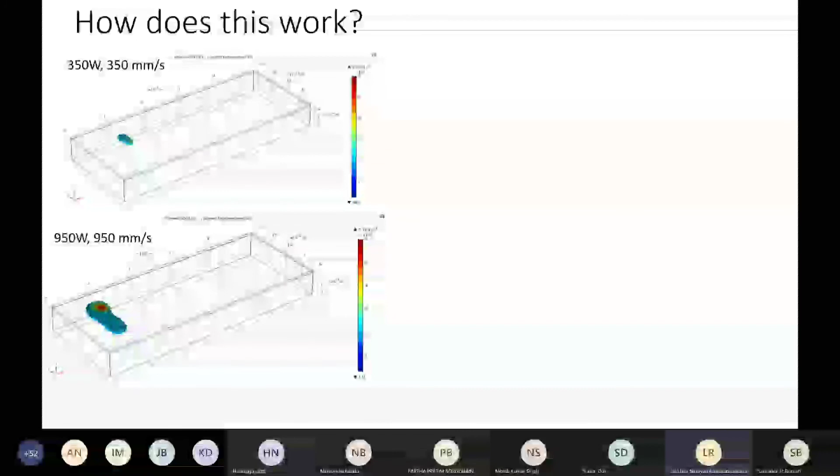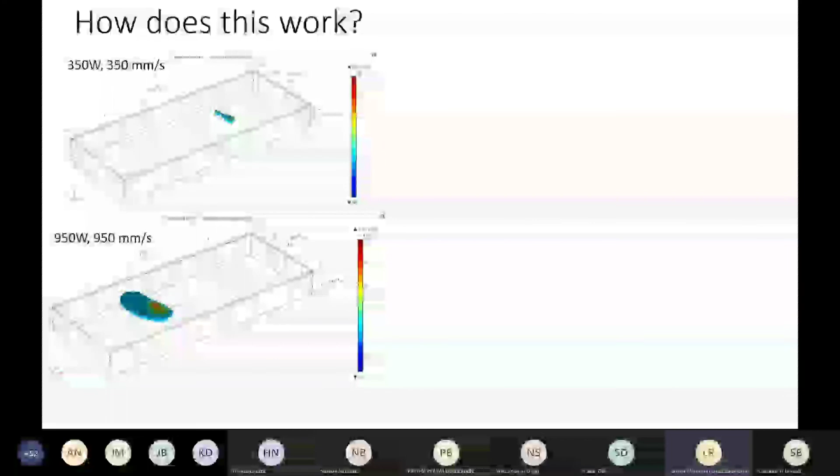Now we'll go for the stripe scanning strategy, where we have used high power and high speed. With high power and high speed, the melt pool remains molten for a longer period of time, as the heat is retained longer. Because of the higher speed, the return of the laser is so rapid that the melt pool appears larger, or a larger volume of material has been melted, allowing solidification to take place slowly. The melt pool aspect ratio of this 950 watt strategy is much lower, which is very important because keyhole porosity can be prevented.

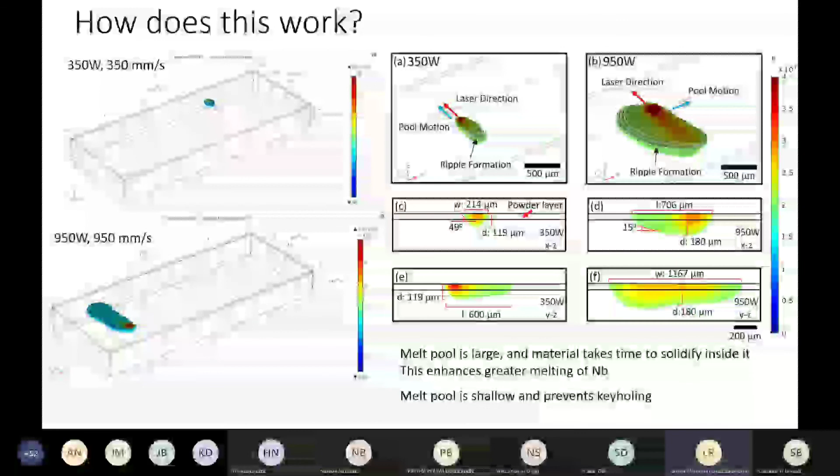By increasing the speed in the stripe scanning strategy, you are melting more material for a longer time, allowing homogenization which reduces the niobium content. This strategy also makes the melt pool shallower because it does not stay in the same place, allowing more material to dissolve or diffuse, and also preventing the keyhole from occurring.

With this, I would like to end my talk, because I just showed you different ways in which a materials engineer can analyze things. In fact, this did not even require an engineer to understand the process—the process deals with logic. As a materials or mechanical engineer, you can contribute in different aspects of the structure, process, properties, performance pyramid, which is very popular in material science, and everybody can contribute.